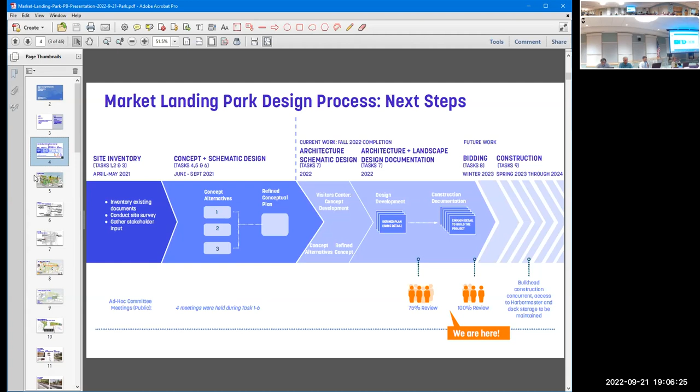This is just a recap of the site plan and design changes we presented last time we were here, so we can distinguish all of the bike parking, some of the parking along the east and west blocks, and some of the vehicular situation as well.

Tonight we included some black and white drawings to really get into the details. This slide you've seen before, but there's some additional information.

We widened the shared use path - maybe you could zoom in a little, it might be hard to see here. It's a 10-foot shared use path, and we've essentially doubled it at the end, flush, so that pedestrians and cyclists will be directed towards the parking lot and away from what will hopefully be the future extension of the shared use path. That's 21 feet wide there.

One other minor note on the other side of the plan: we coordinated with our electrical engineer to confirm we'll have power available to make the whole row of parking EV capable. We'll be adding conduit, not the wiring, making sure it's stubbed and labeled appropriately so it's clear what the use is for when the city is ready to invest more heavily in parking spots. We've also had more conversations about the transformers and added a note there for the transformer location and power use.

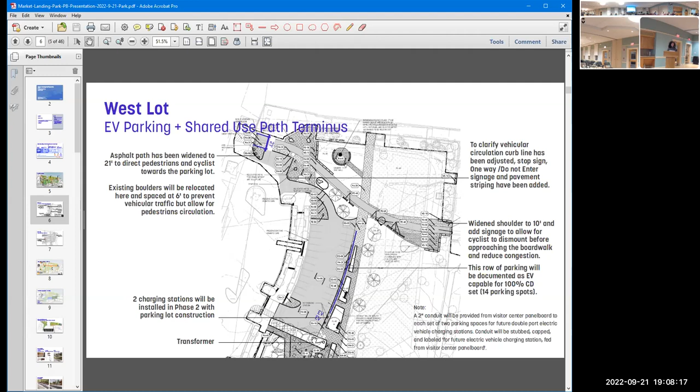In the east lot, a few clarifications here. In the last meeting we shared illustrative drawings; now we've brought in the black and white so you can really see the details. We had presented additional bike parking both along the service parking area, along the walkway, and at the beginning of the shared use path.

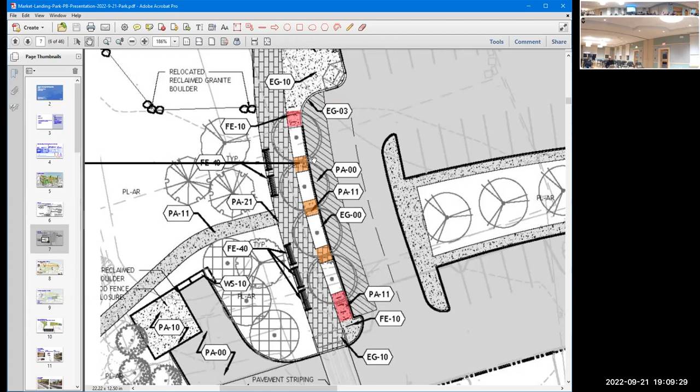If you could zoom in to that area where we've added bike parking - exactly. We looked more closely at where we can put that parking: there's 3 bike racks on top and 5 at the bottom. We've added some additional paved structures to the planting bed so that, for a large event with 3 service vehicles, you could easily get from the back of one of the trucks onto the sidewalk. There shouldn't be any conflict between cyclists, and we wouldn't be forcing anyone to walk out into the parking lot. So we've made that subtle change there.

This is again very similar to the slide we presented on the 7th. I'll just highlight that we've added a notation here, and also in the document drawings submitted, for signage at bike parking locations - one on either side of the shared use path as you enter the park, and one at the visitor center.

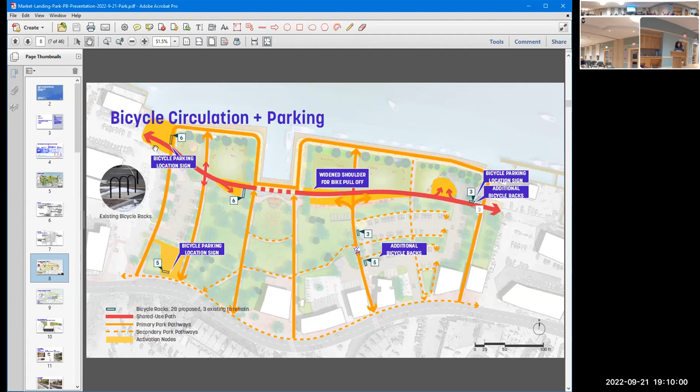Again, this slide should look pretty familiar from the 7th. We just clarified some language - changed the label from EV ready to EV capable for those 14 added spots - and clarified the service parking: event service parking in the east block, and one restaurant-for-hire parking spot adjacent to the new dumpster enclosure. We've also clarified where the 8 permitted spots would be; they exist today, will be slightly reconfigured, but maintained in the proposed parking lot.

As a reminder for some of you, those spaces are actually associated with this building here. The redevelopment authority had agreed years ago, in relation to that project, to designate some spaces, so we're maintaining that commitment. Essentially, we're just reconfiguring where the spaces are slightly within that lot.

Just some updates to this slide. We've added in the phase 1 part to give a fuller context of what phase 1 will look like in that interim condition, the interim parking layout. We've also reconciled some of the discrepancies in the parking count, so those have been adjusted. And again, we clarified where those 8 existing permitted spots are, and they'll be maintained in the interim.

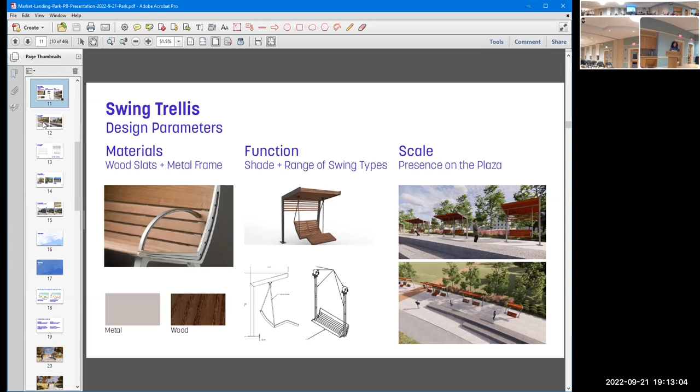Really importantly, they have the right scale for what will be the center of this park, the heart of Newburyport waterfront. Part of that has to do with the shade structure providing that volume, so it's not just a linear element within the plaza, but also thinking about how the structure has been laid out within the plaza and the rhythm, which we spent quite a bit of time considering as we developed from schematic design to the 75% set. The next couple of slides will speak to that 75% set design.

Here you can see the lounge and seat-style swings, which are intermingled, so that if you have kids that want to play on the lounge seats and grandparents that want more of that structured back and arm support, they could still sit next to each other but in swings and socialize. We've spaced them out so that you can circulate around them, and someone could be behind and pushing the swing.

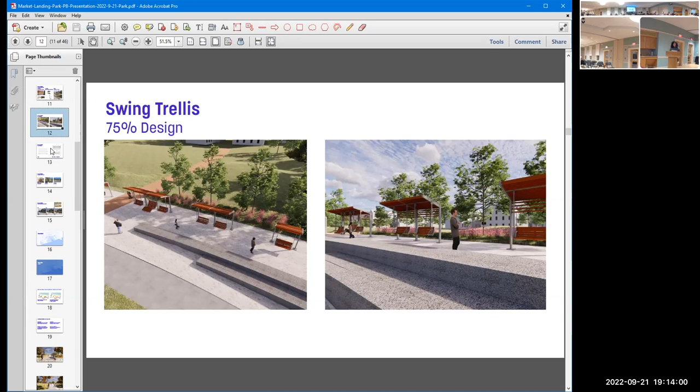It's also a cost-saving measure. There's a subtle curve in the shared use path, and when we looked at what it would take to design that curve, it added a lot of customization and expense. I think it actually creates a really nice rhythm across the plaza with those gaps in between.

This is just some of the details, looking at the wood slats, and there's been a lot of questions around the shade they'd be providing. We have another slide that speaks to that, but what we specified is a 1.5 inch thick board that's 5 inches wide at the top with a 4-inch gap in between. So they're pretty densely structured there. It's slightly different from the earlier renderings, but we've gotten into the details.

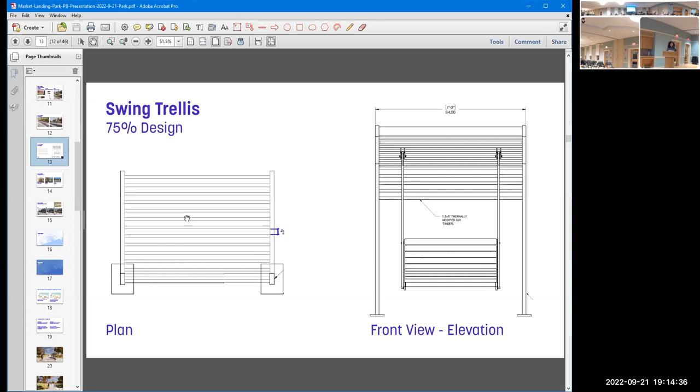Finally, just looking to address some of the questions around shade. I think we are hopeful that the shade structures themselves can provide the appropriate amount of protection from the sun. The canopy structures, more of a fabric, are additional maintenance to consider—we'd probably need to take them down in the winter.

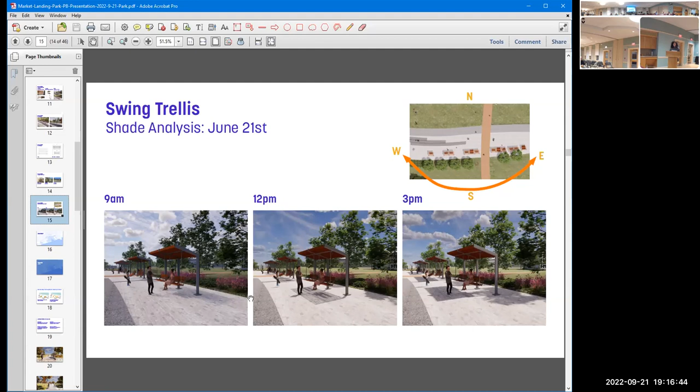And that concludes the presentation. We have a lot of the other slides that we can go through if needed.

Thank you very much. We have responded to certainly the majority of the big questions that we were talking about, and probably in the detail.

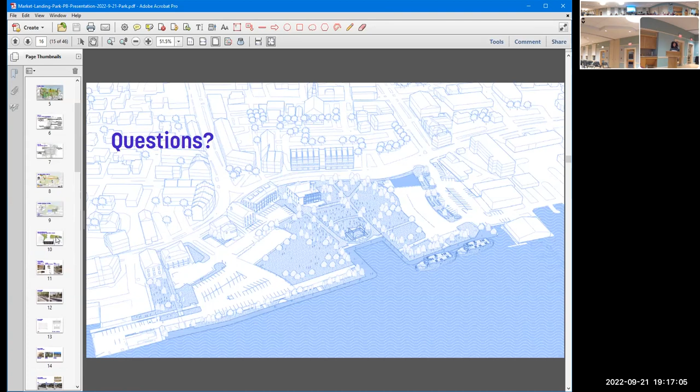I'm not hearing myself. Is anybody else hearing me? When you're close to it, I can hear you.

So let me turn it over to the board members who have their individual questions from last time or this time to comment. I also want to say that we have two members that are not eligible to vote because they missed two meetings, and that's just part of the procedure on voting eligibility. But they are certainly welcome to speak and ask questions about what we're looking at right now. So please feel free, for everybody to comment at this time. So the first person who indicates they want to speak.

Thank you. I guess I have two questions that maybe possibly need the answers. I'm not sure. So the new plans that we have are the one set of 6 sheets or something.

As I said in the email, there are 5 changes here, such as lowering the curb, which doesn't show on that plan sheet. Obviously a different plan sheet, I think the grading plan would be somewhat different. So I'm just wondering how you think we should proceed with this, given that we won't see the final plans. Sure, I understand what you're referring to, because when we first submitted this plan set, I think what Rick is referring to is the fact that we provided an entire 75% plan set.

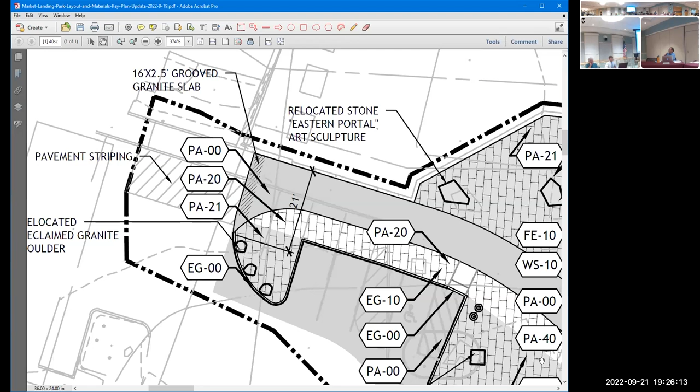But I guess my preference would be not to try to light it during the site plan review, but to do it as a condition of special permit. Sure, we have no objection to that. That makes sense, I think, to capture it there. We're certainly fine, in my opinion.

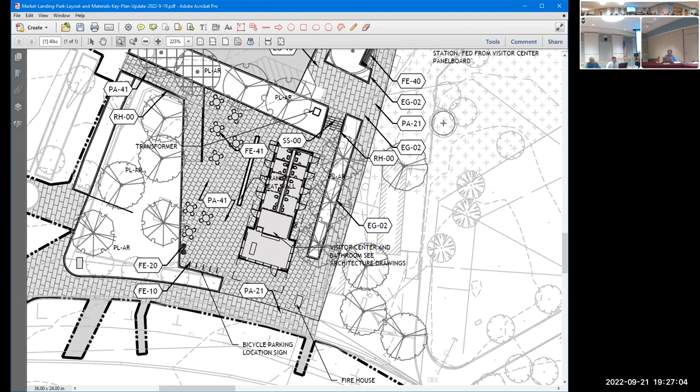Just a couple of quick questions about the swing—one comment and one question. The base scheme that you have, I think, has advantages in that there are no posts obstructing the view of the river. Some of the other alternatives you showed did have posts, so I would encourage you to stay with something that doesn't obstruct.

I did have one question. You mentioned grandparents and kids in this zone, which is very central to the overall park. This is really the only seating option in this zone that I've noticed on the plans, and I wondered if you could speak to that, whether or not there should be some conventional park bench elements as well, to just supplement.

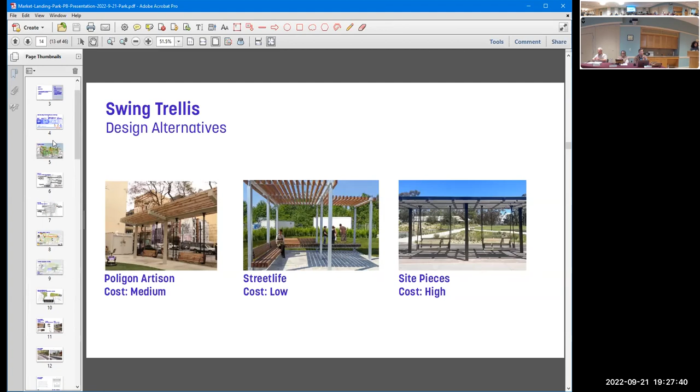Sure, we could certainly look at that. We do have conventional seating on the western gate of the plaza and throughout the park along the pathways. But I think there's certainly room within the area of the plaza. Definitely good, yeah.

Is there any other questions?

Just to follow up on the question about the seating area, is there any designated handicap area adjacent to the swings so that we can offer that in close proximity?

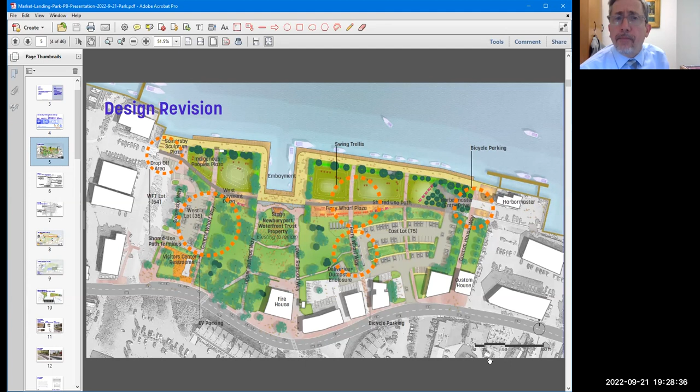Yes, we do have companion seating at the social seating area, sort of these granite steps, so there was space. Just below that, we've included a space so that if you're sitting on a seat you can pull up your wheelchair. And with any of the cafe tables or picnic tables we've selected, we've included an ADA option within that.

I think you're asking specifically about if someone could pull up next to one of the swings? Yes, my question was more related to someone who had someone on the swings and they could be at least adjacent or nearby for supervision, whatever it's called.

Yeah, the spacing provides that, right? I think that's also one of the advantages of having this gas station structure, you can allow for that type of movement.

Is there someone else who wants to speak? Yeah, I just wanted a clarification on the bicycle racks in the east parking lot. I like the additional bike rack, I think that's good. So we have the section there where there's bike racks, but there's also another section nearer the harbor master building, and I just wanted to confirm, are both of those in phase two, or is the section by the harbor master going to be part of phase one?

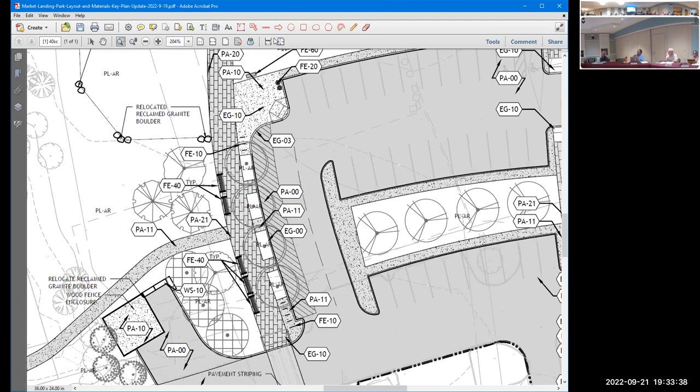That's the first question. The second part, related to this, is we talked last time about these additional bike racks being way out of the direction that most bicyclists would come. We asked whether it would be possible to come down Ferry Wharf Way, away from the shared use path, to those bike racks and use them. Is that possible, and is the signage clear?

Great question. I'll defer to Maren on the design question, and I'll take the Ferry Wharf Way question, since we did discuss whether it would make sense to widen Ferry Wharf Way. From the benches perspective, I have no objection to adding or adjusting where benches are, but one thought is that people will be congregating or meeting in that location since it's adjacent to the parking lot, so having some seating there might be beneficial. Maren, do you want to speak to the width itself?

We have signage, as Maren mentioned earlier, at each of the key entrances to the park directing folks to where additional bike parking is. So if they got to this one or the two that are there, and there wasn't sufficient bicycle parking because it was all used up, they would see a quick sign saying head up the path this way and turn left, and you'll reach additional bicycle parking. Maren, do you want to speak to the width of the way?

Sure, two comments. We had designed, and I think we covered this before, using this long area behind where those benches are to accommodate food trucks and other parking, so those could be good places to have lunch, and it can feel like it belongs to the park.

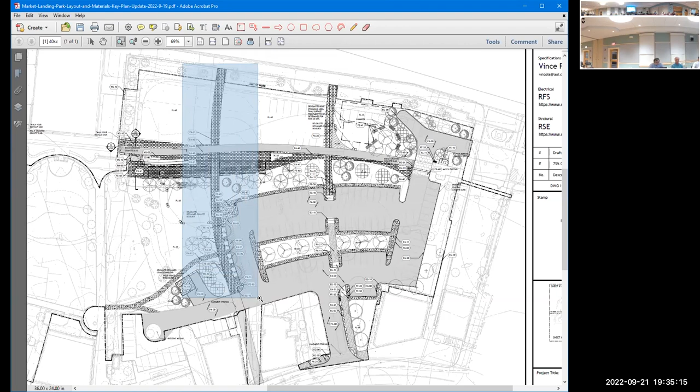We did look at the width, and it's actually a 12-foot wide path, which is wider than the shared use path. The shared use path is 10 feet with a 2-foot buffer to make it 12 feet wide in order to handle fire truck access. So we considered widening it, but realized it's already the widest path in the park, and it needs to accommodate that extra width.

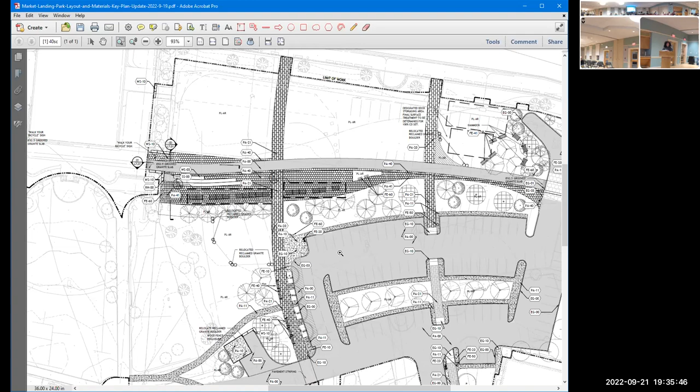In terms of those benches, since the idea is to have the best possible outlook in that area, would it make sense to flip them to face the park, like toward a landscaping area? It might be more attractive to look at the park than the parking lot.

Yes, I think we could certainly do that for the two that are farther into the park. For the three near the edge, maybe it's different, so that's what I'd recommend.

Keep in mind, we covered this a bit more in the last meeting, but this area of the lawn is being designed so it can support some vehicles, both for the setup of larger events and for placement of food trucks and things like that. So there's a need for some back and forth of vehicles potentially there, not all the time, but during key events.

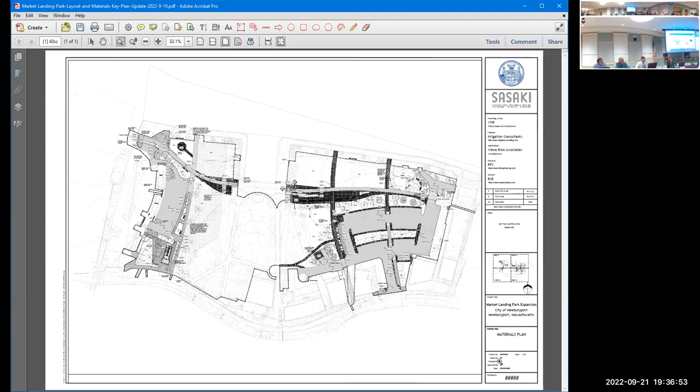Is that transformer going in separately in phase one, so that we have the two EV charging stations up and running? There are potentially two transformers depending on which level of EV charging you select. The first one, to support just the two EV spots at level 2 charging for the full day, is located in the landscaping that would be part of phase 2, along with the transformer going in at the same time as the EV parking and the full parking lot in phase 2.

So that's straight phase 2, since it's part of the parking lot. Right, so it's a little later than phase... it's phase 2, not phase 3.

Any other questions? Fine.

Actually, a somewhat similar question - so the transformer will not be installed until phase 2? Correct. I mention that because the black and white sketch specifically notes the 2 EV stations for phase 2, and the transformer wasn't labeled for those 2 EV stations and/or possibly the future ones. Perhaps you might want to put a note on this, even though I'm assuming it's not going to be in the bid documents for phase 1. Sure, and we do have Jamie Millette listening in here, and she may be better to speak to exactly what utilities we're putting in within phase 1. Obviously we won't have the EV parking, and we won't need that transformer, but I believe all the groundwork will be happening in phase 1.

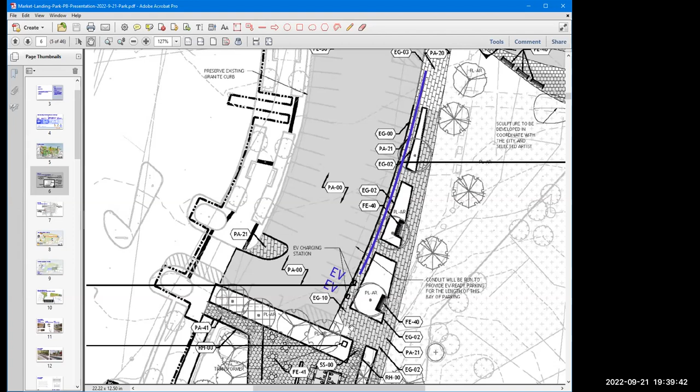That's fine, thank you. And also, what is the elevation of the base of the transformer?

All of the electrical is being designed to be above flood level. So this one I can't speak to specifically - we haven't looked into this one as much, but I know there's one adjacent to the water where we looked at that elevation very closely.

Sorry, hi. We haven't looked at the elevations yet, but we were basically planning on doing the same thing with that equipment as we're doing with the building. We had brought the building up to 15.33, and obviously we're going to be looking at this piece of equipment. It's going to be basically on a concrete pedestal, probably, in its location because it's closer to the water, but it still needs to be elevated to stay above that future sea level rise. So that's effectively what we're doing.

We happen to be looking at a lift station the city's looking at on Water Street, going out to the island - we're looking to do the same thing, basically move that inland for similar reasons. I can tell you the planting bed where we located the transformer right now actually has quite a bit of elevation - there's some steps right next to it that go from 12 to 15, and the plaza is set at elevation 15 to get the building at 15.33, which would be the 2070 1% storm.

My only other comment would be that whenever you do put the transformer in, whatever phase, it's not obvious to me looking at this that it would take into account some form of shrubbery or fencing, as compared to seeing some type of transformer, which I assume is a yet to be determined size. You've done a whole lot of great work and all those things, and the worst thing people want to do is walk past and see this ugly transformer like the wastewater treatment facility. That's why we raised it up, and we have some flexibility at this point.

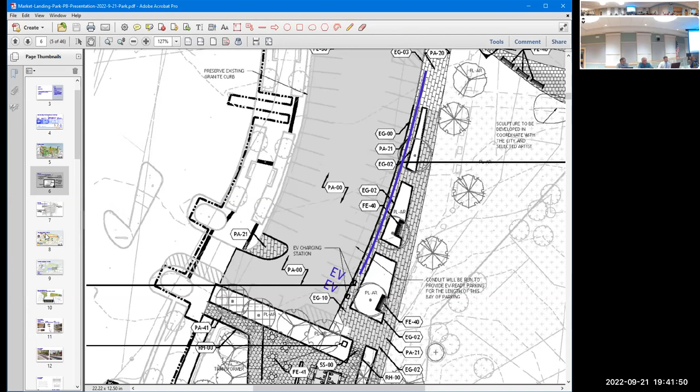Correct, so if I'm not mistaken, I think what we're seeing here is in phase 1 we're doing the walkway, but we're not doing the transformer, which would be part of phase 2, which is the parking area.

The prior presentation, or is it part of the appendix? It might be part of the appendix here. Yeah, one phase 2. Okay, so right down here, you're talking about...

Right, so we need to add that, expand that phase out. Got it. But the problem is then you're going to be raising the platform for the business. So before it's there, yeah, that's as well. Yep, to put it in. I'm hopeful that we'll be able to get some state funding, economic development, tourism, and whatnot for the visitor facility as well.

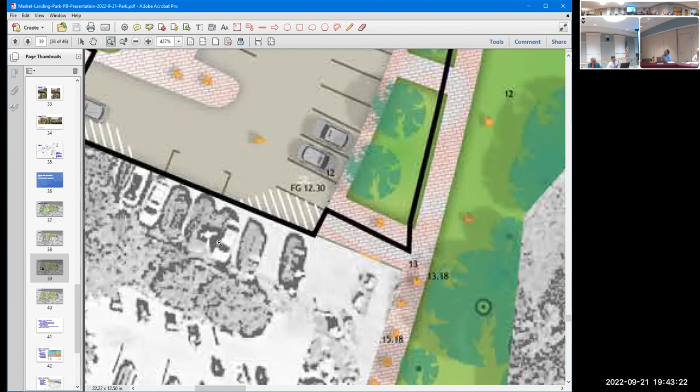All right, last call. Any other comments or questions? Richard? Just a minor one. If you could bring up the black and white close-up of the area where the trucks would be temporarily parking for events and things of that sort. I just wanted to make one small observation, it's not a question.

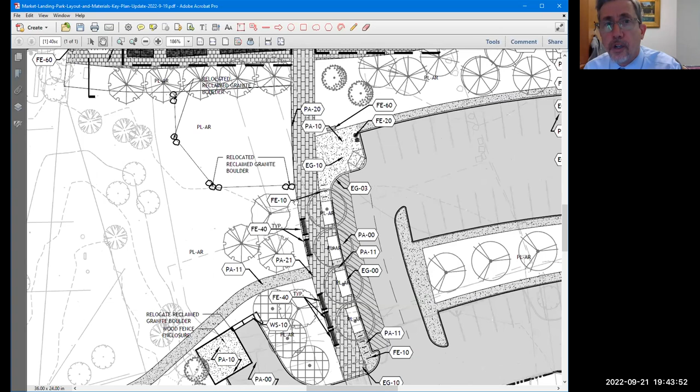So the newly installed, or what will be the newly installed bike rack, those 3 racks right at that corner where the trucks are going to come in. Yeah, can you put your cursor right here? No, up. Those are the 4. Go up. Oh sorry, you're right there, here.

Right here, yeah. You may want to consider putting a bollard there because as those trucks back up, they're going to take out a bike. Just a practical observation. Gotcha. We will do that. Yeah, it's too tempting. Okay, good point.

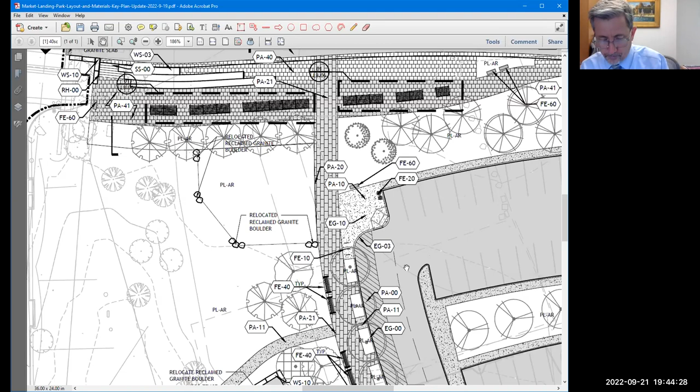Board members, is that it? Okay, so we need to review the decision itself.

I know in conversations with Rick, we found some things that were not included from our previous discussion. When I read through this and took very sketchy notes, we reconstructed those and submitted the changes to Andy.

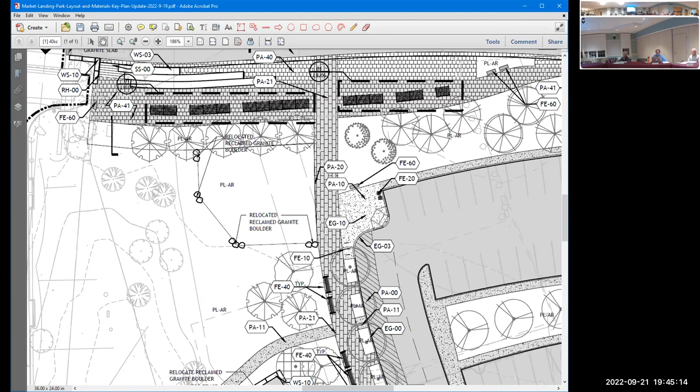I'm just wondering, Andy, how you want us to proceed correctly. Did you see what Rick had submitted to you? And my apologies, did you send it late today or was it... Okay, well, my apologies, for whatever reason, I'm happy to pull that up right now. Do you want to cover the extent to which any of the special conditions or whatnot in the draft decision from the office are incorporated, and then go to that, or how do you want to?

Okay, sure, yep. A lot of things that we didn't discuss the last time. And if there's any further outstanding from tonight's discussion, we can add them in, and that will be the final draft which we will vote on tonight. And my apologies that I hadn't seen that.

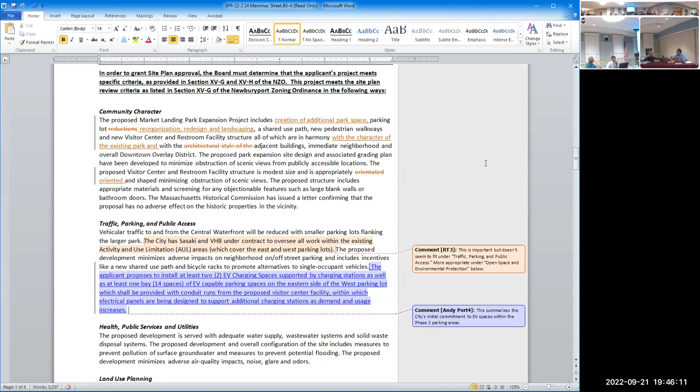Okay, here we go. So on the community character, this is really just cleaning things up. I think adding creation of additional park space, parking lot reorganization, redesign landscaping in harmony with the character of the existing park, just to be a little more specific. Those are just language tweaking. Under traffic, parking, and public access, I thought the thing about activity and use limitation areas is really not related to traffic and parking, but was related to environmental protection, so we move down to that section.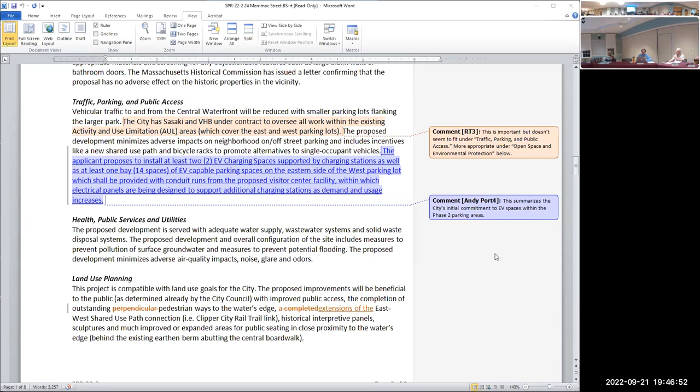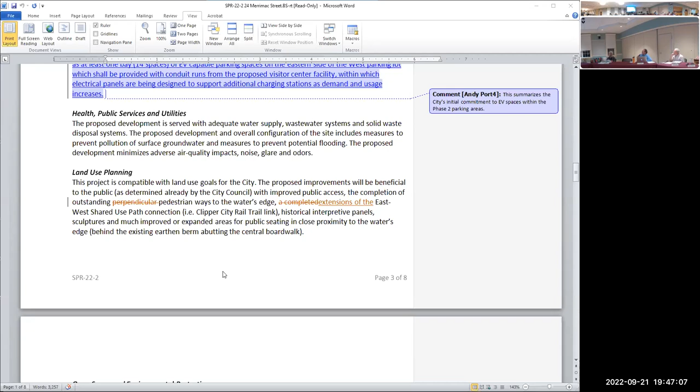There was the area there about the charging stations. On the next page, site plan, architectural design, that was very... sorry, did you want to? Well, just that clarifying words. Yep, so there's some very small minor changes.

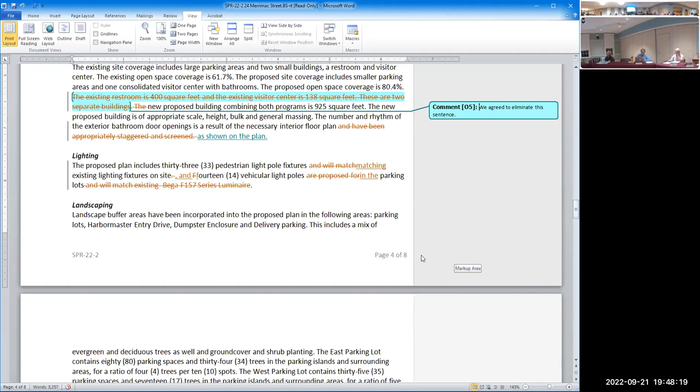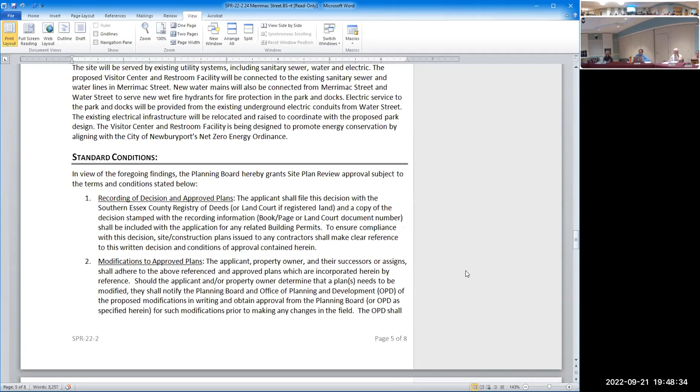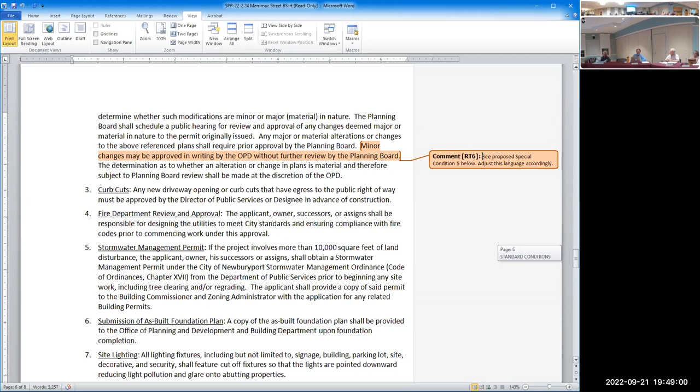I had a question on hours of construction, whether we want to allow working on the park on Saturday. Well, at this point in time, we want to allow any flexibility we can given the unusual circumstances, trying to minimize impact on the peak summer season. Unlike the bulkhead project, which can be done over the winter, we have to do this during the peak summer season, so we'd like to allow that latitude. We'll be coordinating between the mayor's office, the ward councilor, the parking clerk and others, the Waterfront Trust, making sure we're not impacting folks, but we would like to allow construction work on Saturday from a permitting perspective, to the extent necessary, even if it's one day here or there.

But I think you're right, in this instance it doesn't need to be referenced in this decision. So, under special conditions, taking note of the new special condition number one. Rather than say '12 to 16,' it seems like it's fewer than that, so I thought it would be 'several' instead.

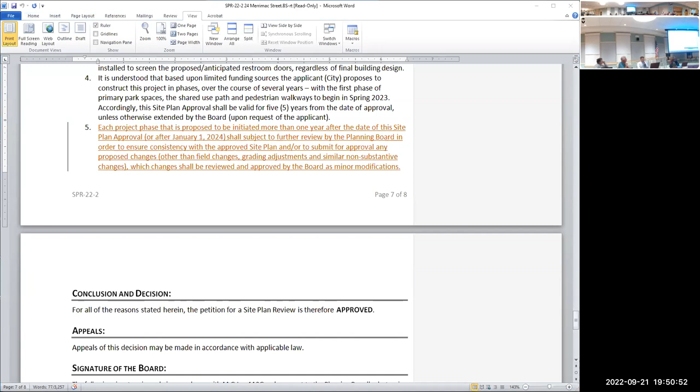So number 5, this is something to consider. The project is likely to change over time, so I'm proposing for discussion that each project phase be initiated more than 1 year after the date of the site plan, as an option, or a specific date that works. It would be subject to further review by the planning board to ensure consistency with the approved site plan, and/or submission for approval of proposed changes, other than field changes, grading adjustments, or other similar non-substantive changes, which should be reviewed and approved by the board as minor modifications. The reason for this is that there are likely to be changes as you refine the plan by the time you get to phase 2, so it would be appropriate to come back for either confirmation or review if it's very different from what was approved.

Could I ask, thinking about it from a project management perspective - in the scenario where there aren't any changes to the plan, and two years out we're doing phase 2, the parking, the visitor building, and there aren't any changes, could we adjust the phrasing so we wouldn't necessarily have to come back procedurally if there are no changes? I appreciate that concern, seeing how long it could take to do some of these projects.

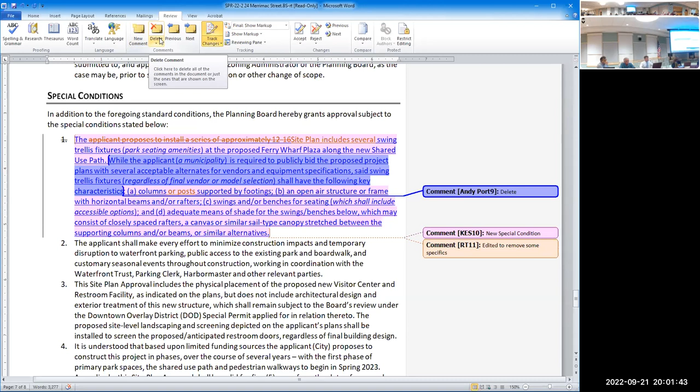Yeah. And if you put that on the end. That's what I wanted to check, because included in number one is...

Any proposed design significantly different from what has been presented to the board in this approval should come back for review. Understood.

Just a quick procedural question. The comments that were made tonight, the detailed comments, how do those get addressed?

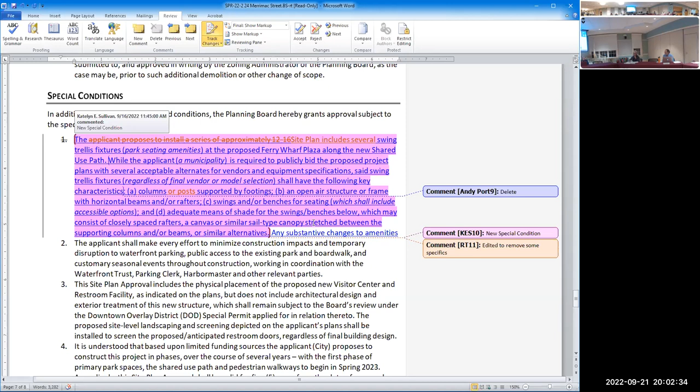That's why we want to see the plan. There's nothing in the language here that addresses that, unless there's something we missed, so we talked about wanting to call that out. There was a volume mentioned, and a discussion of benches mentioned, so that's just updating it.

Right, is everybody comfortable with this? I'll take a motion to...

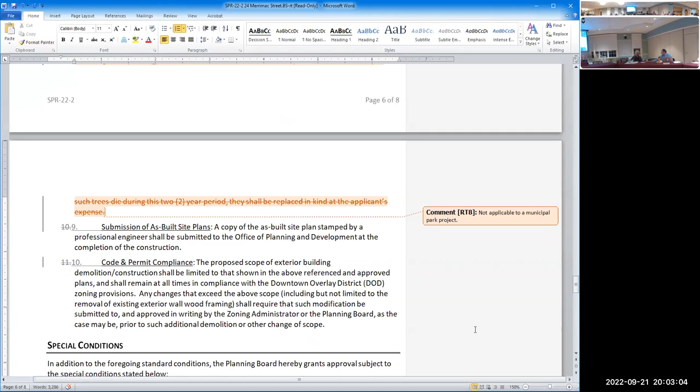No, no. Yes, we're going to review the decision at that point. As typical, we expect the chair or vice chair or both will be looking at the draft decision before it's filed to make sure it's consistent with all of your adjustments tonight. Oh, I see, before it comes back. Yeah, that's normal. I usually refer that in the office as well.

We typically understand that to be as amended this evening, so the draft decision as amended this evening. Okay, ready? So I need a motion to approve the site plan review application for 24 Merrimac Street, Market Landing Park expansion and restroom visitor facility, as amended, with incorporation of the findings and special conditions reviewed tonight, as provided by the Office of Planning and Development, into the board's decision.

Thank you. Rick moves it, second.

I will now take a roll call. Alden, yes. Beth, I abstain. Bob, yes. Jamie, yes. Heather, yes. Rick, yes. Don, ineligible to vote, abstain. Richard, yes. Bonnie, yes. Motion is approved.

So I think you've seen the building, and I'll go through our thinking process. Some of the previous feedback we received from the ad hoc committee was that the building geometry would be perpendicular to Merrimac Street, and wood cladding was preferred over exterior finish.

The visitor center is to face Merrimac Street with maximum transparency to the visitor center interior. The restrooms are to be individual gender neutral spaces that open directly out to the outside, which helps minimize the building footprint and makes for a very efficient footprint.

There's a flat roof on the building that holds south-facing solar panels, with a parapet that conceals the view of the panels. With the building running north-south, we get this plan layout. We looked into roofs in different configurations, but with the building oriented north-south, the solar panels want to tilt south, as part of the net zero initiative of the building. It worked best on a flat roof rather than a pitched roof facing east and west.

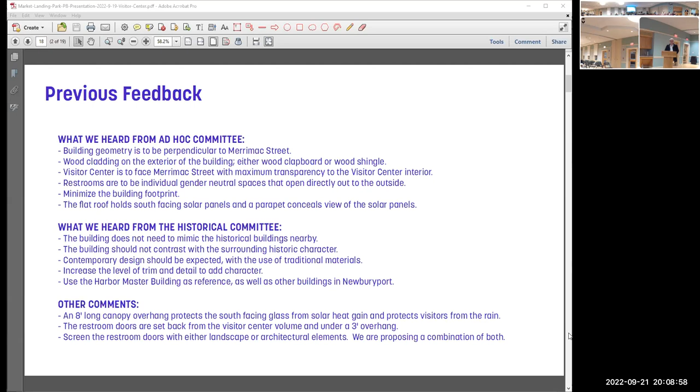So the proposed site plan, included as part of phase 3, faces south. This is the site plan currently in development for that space. Again, the building is perpendicular to Merrimac Street, south. There's a seating area on the west side of the building.

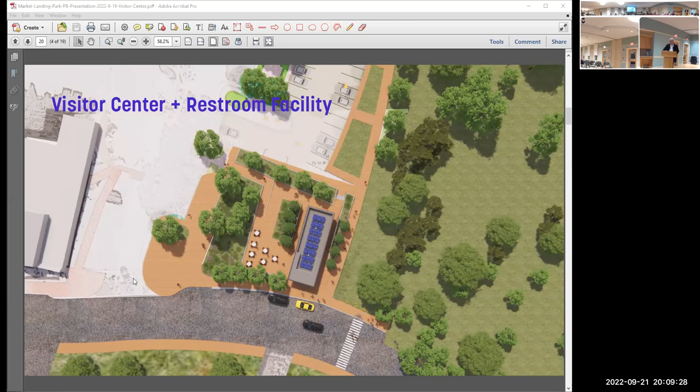Here's the plan layout - you may have seen this. The visitor center is on the south end. One change we're proposing is centering the door, which I'll show in the rendering later. There's a mechanical room and janitor space in the middle, and then 8 individual restrooms.

As per code, 50% of them, so 4, would need to be handicapped accessible. The idea is that the two closest to the south would be open year-round, while the six further north would only be open seasonally, from May to November. This goes to the question of operation of the facility.

There were questions, and we want to provide flexibility for the future to zone the building, essentially the restrooms, so that we could keep it open more of the year without necessarily running the entire facility.

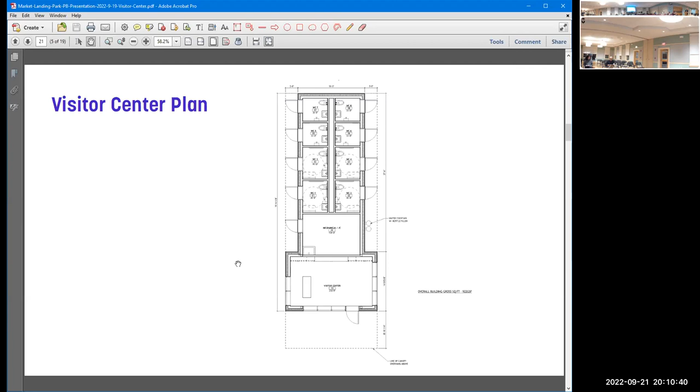Another thing that came up in our process was the notion of resiliency of the building. So we set the building at elevation 15 feet 4 inches above sea level, which is 40 inches above the FEMA elevation 12, the base flood elevation level - I may have the acronym wrong, but it's intended to be 40 inches above that 12-foot line, which represents the 1% storm event.

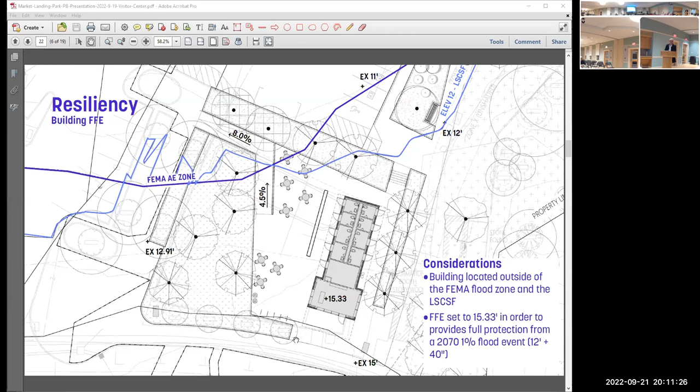Traditionally this may have been made as a slab on grade, but we've made it a wood frame floor with a crawl space underneath, since the building needs to be lifted up in the future - we're setting it up for that. We also took input from the city engineer on that particular adjustment to work on the footing, and to leave enough space so it'd be easy enough to reach underneath and raise the building. This is looking further out into the future, but that's why we're here - to plan for the future.

We know that the harbor master building is a building preferred by some members of the committee, and so we looked at that as precedent.

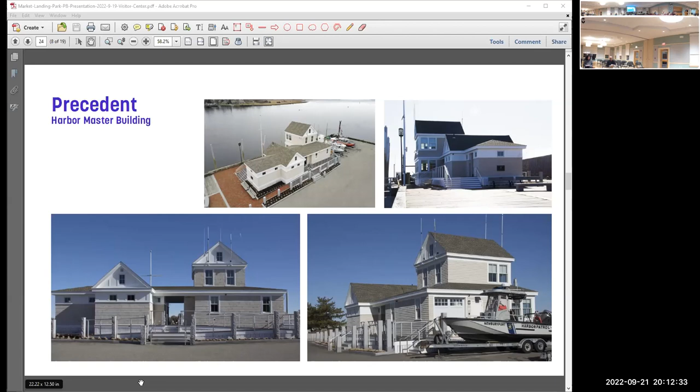Shingle clad with white trim. We also looked around Newburyport, primarily the influence of federal style, which is a very unpretentious building style. It doesn't have a lot of architectural detail. It's fairly tight construction. There's a rhythm of windows and openings, with center entrances predominantly used, and an emphasis on the roof line. You can see a few examples where there's actually a pitch roof, but it's very shallow and set back, so from the ground the roof line doesn't fall out. There's also a few storefronts we've seen in town with large panes of glass.

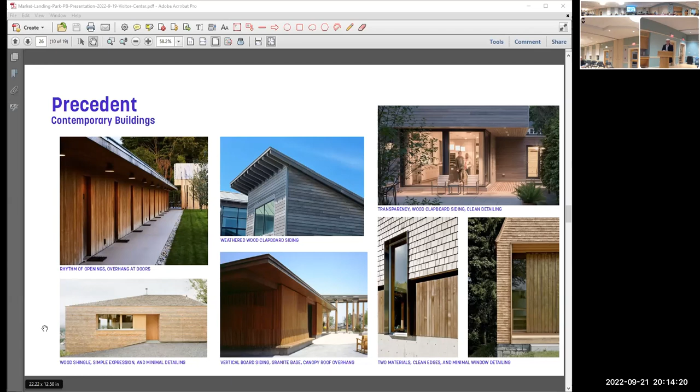Some of the materials on the building are either cedar shingles or cedar clapboard siding, or a combination of both. We've looked at and priced teak windows. The original scheme in the drawing set just has teak windows without a paint finish. So when we started redesigning a little bit, we started looking into white trim. Teak is great near the seashore - boats are built out of that, it's a good species to use in the ocean. And then there's a granite base around the base of the building, at the wood.

Going through the elevations, two schemes. This first scheme has all clapboard siding - we're using horizontal clapboard siding on the visitor center volume. This top view also has the scheme that's in the drawing set at the moment, which has the door off to one side. When we originally had the building on the west side of the site, the door worked well in that corner. When we moved the building back to where it is now, we intend to have the building entrance centered on the side. That's because the plaza was originally located on the other, right side. Now that it's located on the other side, it seemed to make more sense to have it centered where you're coming in from the park or from the plaza generally.

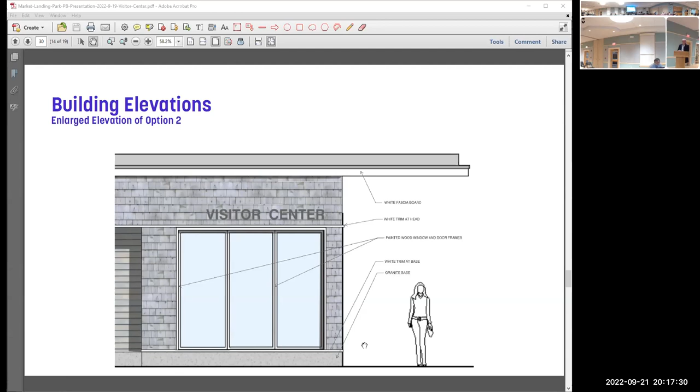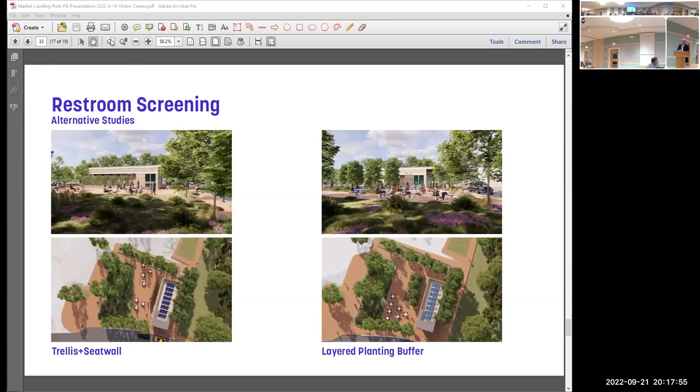Then we did some studies on the restroom door screening. One option is a trellis with a seat wall, fairly architectural element - just a wood trellis, but you can have vines growing on it for the trellis itself. Then there was a second version that had a little bit more planting in front.

And then the third version, shown on the next page, is a combination of both - planting, small planting, sort of a raised planter, and then something taller, with bench seating on one end.

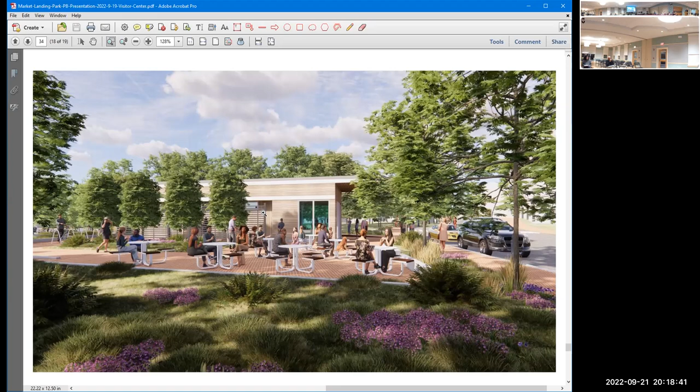Okay, I'm going to do something a little different, planning board for procedures. I'm going to take public comment first, because I want to hear from the chair of the Historical Commission, Glenn Richards, who is available remote, and anybody else who would like to speak. Then we'll bring it back in for questions and comments. Open public comment, the usual rules apply: name, address, and I'm not going to limit you to 2 minutes tonight because we don't have that many people who want to speak, and we really want as much input as we can get to facilitate our discussion. So if Glenn is ready, the questions are muted. Sure, Glenn, did you want to address the board?

Yes, briefly. You can hear me okay? Glenn Richards, 6 Kent Street. Thanks, Bonnie. As I think the board knows, I'm speaking not on behalf of the Historical Commission, which has not formally reviewed the new plans. I just had a couple of quick comments I wanted to make. I think that the architects have done well. Just two things: I would strongly encourage the cedar shingle option.

I think that if you think about, especially in the New England seacoast, especially for smaller and auxiliary structures, the cedar shingles with white trim is very, very appropriate and iconic, and I think that would go well in this setting. So that's one point.

I'll ask the applicant to come back up to the stand. You're on again, and board members would like to speak first. Thanks, Mike. So a few questions. A few questions.

Although it's not included, and although it's a fairly quiet part of the building, I would at least appreciate seeing a rear elevation for the building, because there are two materials there, I believe, the way we look at the overall design. And it faces the park. I think it's worth drawing that just to illustrate what that elevation would look like.

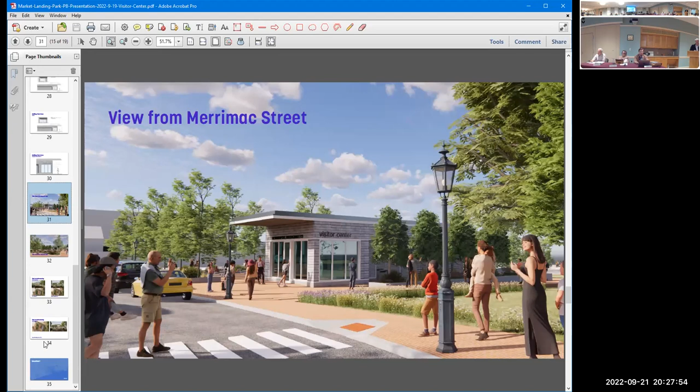In terms of the plans, there are various drawings here, and for the visitor center, on the west side of the plan, there are times when there are 3 windows shown, and there are times when there are 2 windows shown. Yeah, and it's not clearly what the intent is. The intent is 3 windows, and in the original drawings we were trying 2 on one side and 3 on the other.

Again, when the building was located on the west side of the site, we're coming inside of that, the eastern corner of the building is. But we do intend to have 3 windows on each side of the center of the building.

You made a comment about signage, and I would kind of reiterate that I'm looking at signage that has 2 different sizes. Visitor center is one size, Newburyport Massachusetts is a different size. I think you should look at trying to make that more consistent. Newburyport Massachusetts is centered in the opening, visitor center is justified to one side. So I think we've got some fine tuning to do relative to those signs.

We'd also like to know what the material is, and eventually what the color is related to that. Question also about whether there's any exterior lighting anticipated and how that would be handled if you are anticipating that.

There's park lighting, the building itself doesn't have exterior lighting per se, there's small can lights underneath the soffit of that overhang, as well as one at each door along the side. Those are just downlights that we put up for safety, and then there's park lighting for the plaza.

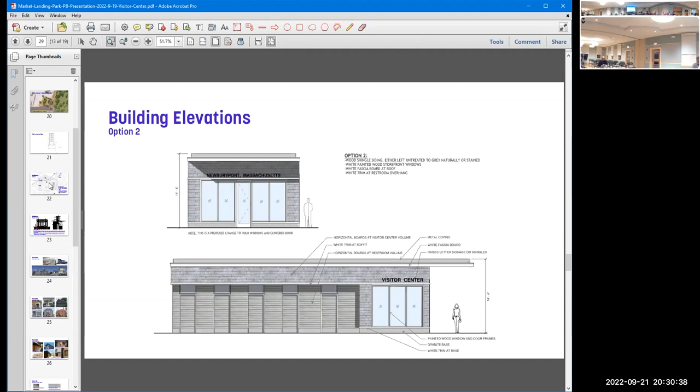And the final question is about the resiliency and raising the building. You went to the trouble of drawing a section detail there, which raised a lot of questions for me as to how this would actually happen.

Since the foundation wall comes up to the underside of the floor joists and would allow access to that crawl space, how do you deal with plumbing, how do you deal with adjustments to grade, since grade immediately in front of the building is on the sidewalk, and then that affects the street. How does all of that work?

Or is this just the grade flush with the doors, so these are accessible entrances? But if you raise the door, of course you have to raise the sidewalk, and then you have to raise the street.

Yeah, we don't. We're keeping the detail so that the top of the footing is actually below grade, and we're counting on waterproofing to keep water from getting in. So you go back to that detail.

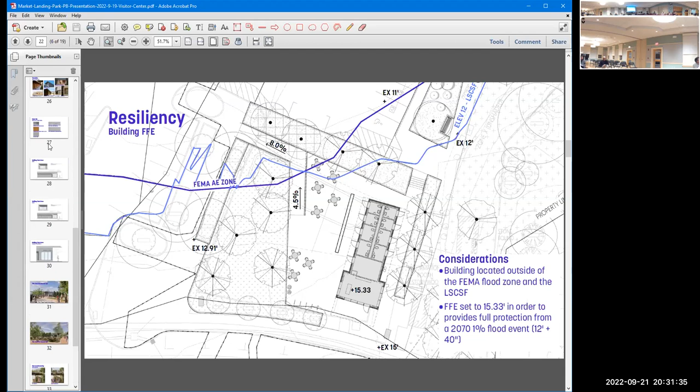So the exterior grade paving is flush with the floor, the interior floor. And the sill plate goes 2 by 6 feet above the concrete. So the idea is that you can break the building from the footing, you can raise the building in the future if it's easy to go up. And that would assume that we have to raise the exterior grade and raise the floor.

I understand in concept, I just didn't understand the reality of how it actually works. So I think there's a little bit more work to do there.

So it's very similar to the wood frame house that we looked at. But the stone gets removed, the waterproofing is broken, and the stone comes off. The plumbing somehow is disconnected underneath. It requires access at some point.

We do intend to have maybe a knockout space in the concrete wall at either end, so there's some consideration to making that feasible, hopefully it doesn't have to be looked at. If I were showing that detail, the elevation that we developed this year, it would help understand a little bit more how you would come at it.

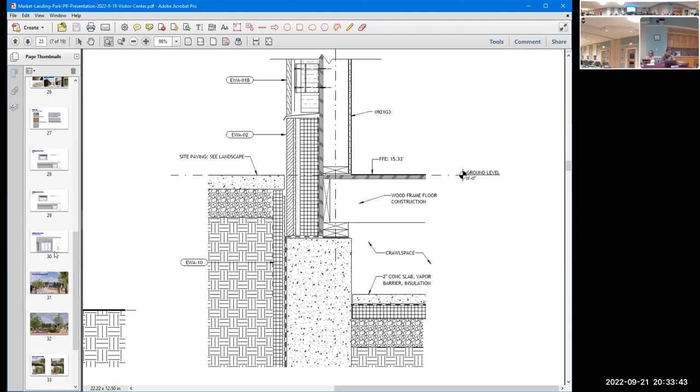I guess I have questions about the screening that we had mentioned earlier. We decided that she agreed that the screening will be part of the special permit. So we got a site plan showing the location and dimensions of the screening as well as the elevation.

There's a little bit of a discrepancy, or there are discrepancies, because I would call them artistic discrepancies. The black and white plans show 3 trees along the area between the Central Walkway and the east side of the restroom, and the color sketches show 4 trees. The original plan, the one in our August set, has the building on the other side of the project, right? So it's a totally different location.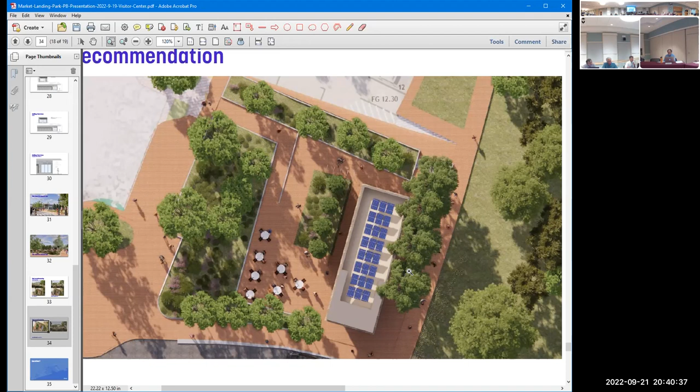Well, we're on screen and moving through different options. This planning board would weigh in on which of the options for screening of the bathroom doors. I usually don't start, but I'll say I like the next one, the trellis and the trees with the low planting. And if others have other ideas or want to make arguments for that, I'll take them.

Can you pull it back up again? Are you looking for the three options? Yeah. Sorry, so there are two shown here, and then there's the third one that was recommended. I agree with the chair. I think the multiple layers, if you will, at different heights or elevations—this one here just has the trellis feature, this one has some trees, and the last one has all of them.

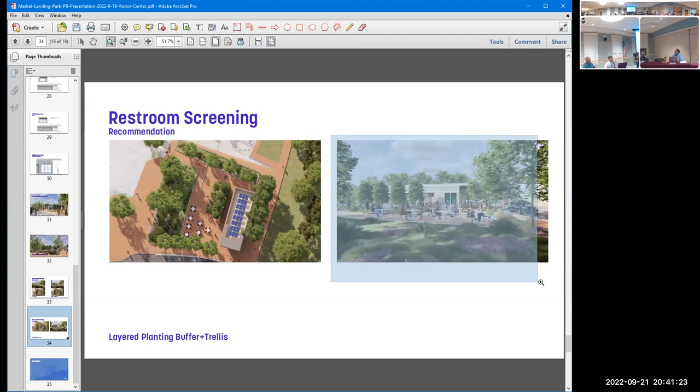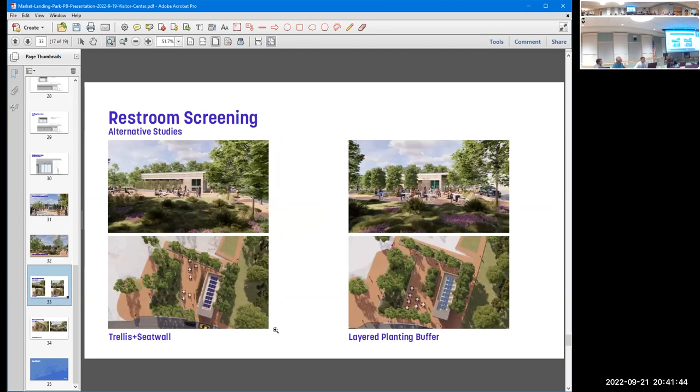So, does anyone have any opinions on one of them? Grab a mic, there's one right here. Sorry, John—I actually prefer the first one with the bench seating. I just think it's simpler and cleaner, and it makes sense to have bench seating outside of the restrooms. I couldn't tell on the proposed one where the bench seating was.

The intent is that it's semi-perforated and there's some planting at the low level. So we'll get a little more detail for that.

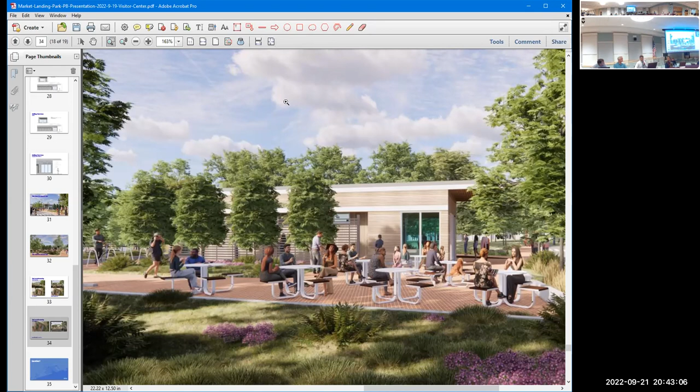Eddie, could you clarify, I think we're still carrying in this scenario, the bench on the restroom side? We're planning to do similar treatment on the other side. I think the question was whether or not in this third scenario with the additional landscaping, the bench is still here, correct? Yeah, okay. But there isn't one on the outside, on the walkway side, correct? Yeah, just on the plaza side.

John, you want to do something on the screen? Let's finish off on the screen first. I have a question on the screen.

I agree that I like the layers of trees and the slats, but if you did it layered, I'm wondering if you could have some with vegetation, trees and trellis shades, and then some just trees with slats and no vegetation. Right, I think that's our assumption, actually that was a discussion we had. For the point you raised, we don't expect to be able to grow things quite as easily in there, so we plan on it just being the trellis feature and not expecting vines to grow up on it behind the trees.

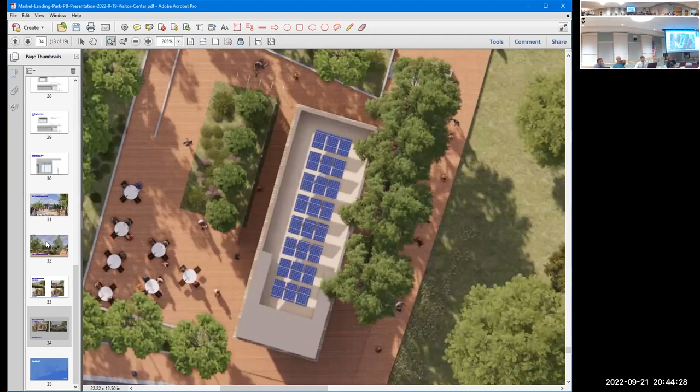Wayfinding, getting to the bathrooms - visibility. If I'm not mistaken, Rick, what you're getting at is you want to confirm the trellis feature is there with the trees, even if this bed is a little more narrow? I guess I was just thinking maybe the same treatment on this side, because the people are so close to the water here.

A different type of screen, I just suggest that. I understand what you're saying about wanting to see through it, but at the same time it might be nice not to walk in circles. I think I tend to agree with the idea that the trellis feature with the trees, to provide that screening, is best on this side as well as the plaza side. The pedestrians are just as close as they go down Central Wharf Way or New Central Wharf Way as they would be on the plaza side. So I think we'll have to look at the width there and what we have to work with, but I tend to agree with that.

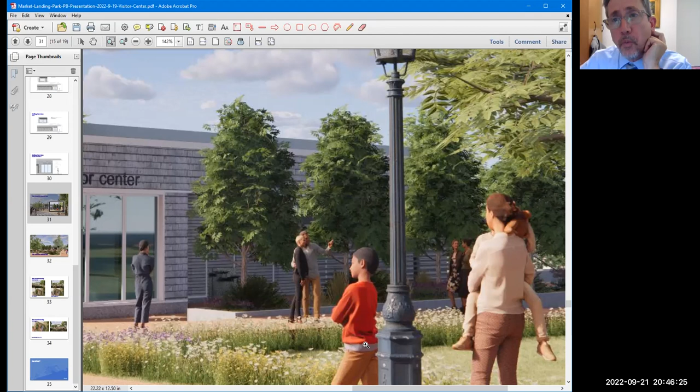Richard? Oh, Richard, sorry, please go ahead. That's all right, I was just hoping to bring up the site plan for option one, the one that's only the trellis. Just in terms of a blow up, you had it earlier - looking straight down, this was option one. So I'm not going to drag it out since I know there's a lot of interest in option three, but I actually prefer this option because it's cleaner, it provides more hardscape.

And if you look at the 3D image, the perspective of it, I thought it was just a cleaner solution. So if it were something to that effect, I would certainly be in favor of this option because I think having a little more hardscape is appropriate here. We certainly have a lot of softscape to offer in the park. That being said, if the consensus is for option three, then that's more than fine.

I also just want to put it on record, I am in favor of this design. I appreciate its contemporary look and also the fact that it's looking at cues from the surrounding neighborhood, like the Harbor Master House, and the fact that it should be shingles, which I believe is what Glenn's observation was. But I think it's the right design and the right solution for where it is.

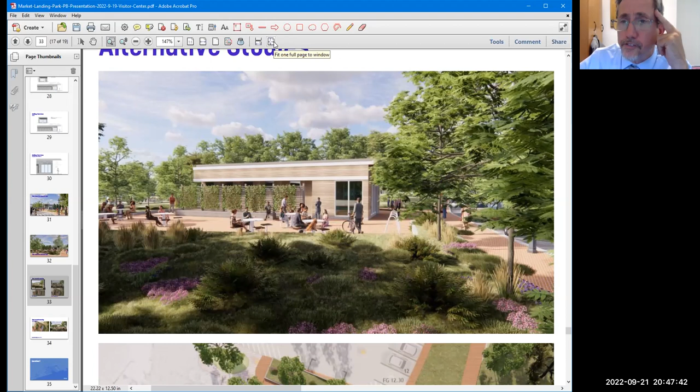No, we're not making a decision on option three tonight. We're going to leave that open, and we will look at more detailed drawings of the trellis by itself and the trellis with trees, as the two possibilities, I think, for right now.

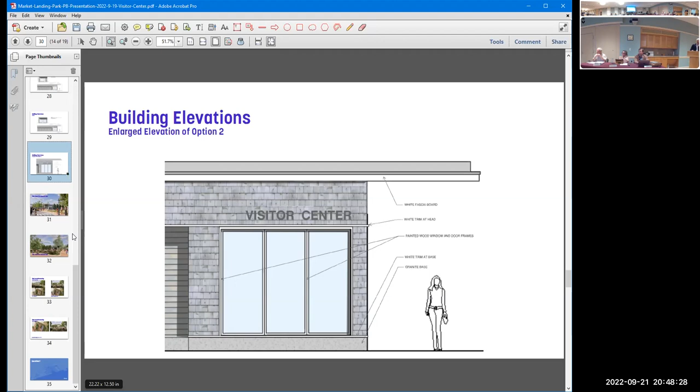I'm just wondering too, with seasons, if the trees are deciduous, what would it look like in that state? The intention was for that to be evergreen. Understandably, as you're looking at the rendering, the pictures look as if it's deciduous. Right, understood.

We'll confirm with the plan blow-up as we discussed, an updated plan with some detail showing the planting types and a bit more detail on each side of the building and the restroom doors. I think I'm really wanting to start with the trees, although I don't feel strongly about that by itself, with the greenery on it.

All right, let's move into the design. Bonnie, I think there may be some more comments here. This is just one additional question, comment, not related to the screen.

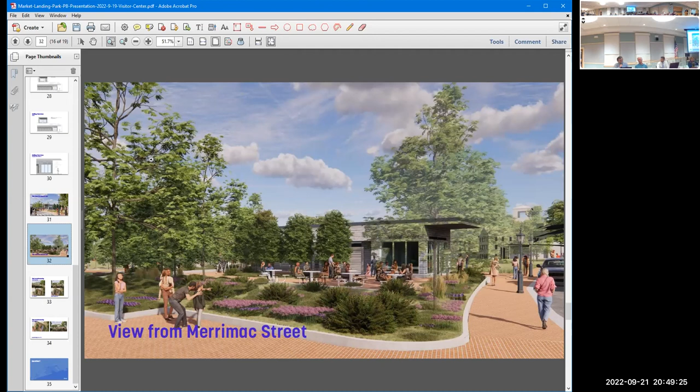Just wondering about ventilation and air conditioning, and the equipment related to that. You've got parapets on the building - have you looked at that in terms of heights? The parapet height is 3 feet from the roof, and it's screening a heat pump.

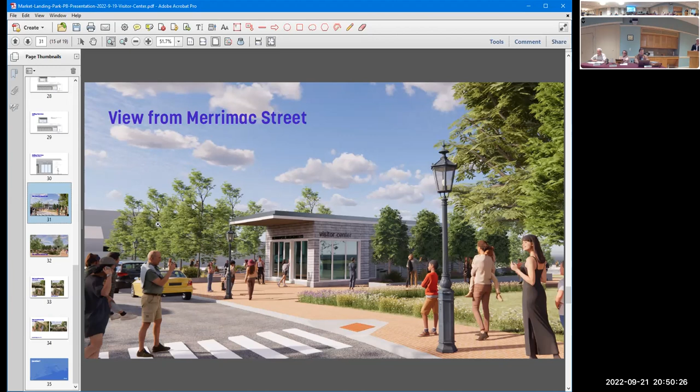No, it's a condenser for the heat pump. The building has moderate air conditioning, moderate heating for all spaces in the building, and ventilation. But the equipment will be one - all of it is on the roof. There's one piece of equipment on the roof, and the rest of the equipment is in that mechanical room space.

All right, I'd like to speak to the design of the structure. You showed us buildings you looked at in Newburyport and talked briefly about the federal style being simple and unadorned, which is reflected in a contemporary way, but not at all in any reference to that type of architecture. And the hip roof is very minimal, and from certain angles from the street, you can't see it. Here, there's no pitch at all, you see.

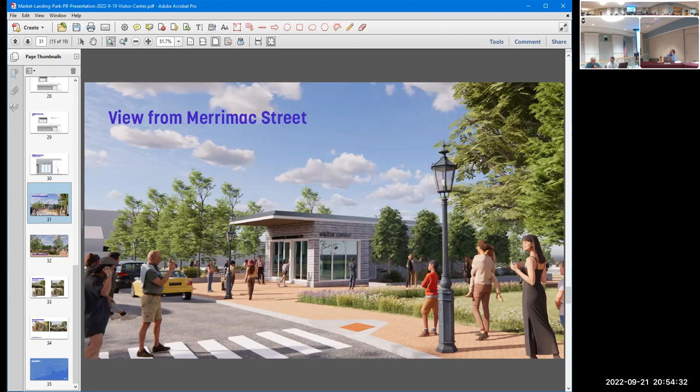So back to my question - I really appreciate the board members' two ideas that may not have been expressed very well about the design and the material. I think you get back here in time. We'll go down - I'll start with respect to the materials. A comment was made earlier that the harbor master was used as perhaps one example with respect to...